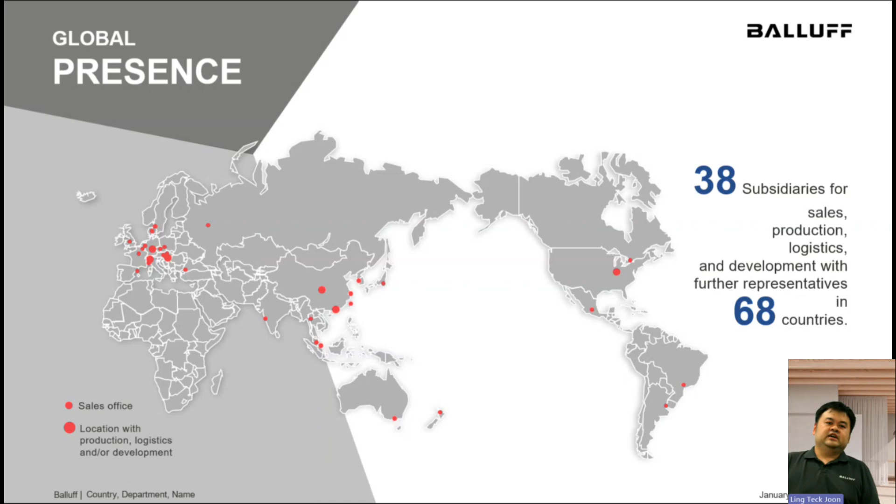We have 38 subsidiaries over the world, and we have further representatives in 68 countries. In the 1980s, we started our subsidiaries in Asia Pacific, starting with a joint venture with Japan.

In 2003, we started our own subsidiary in China, and we progressed to have our subsidiaries in Singapore in 2012, and further developed our own subsidiaries in 2020 in Malaysia.

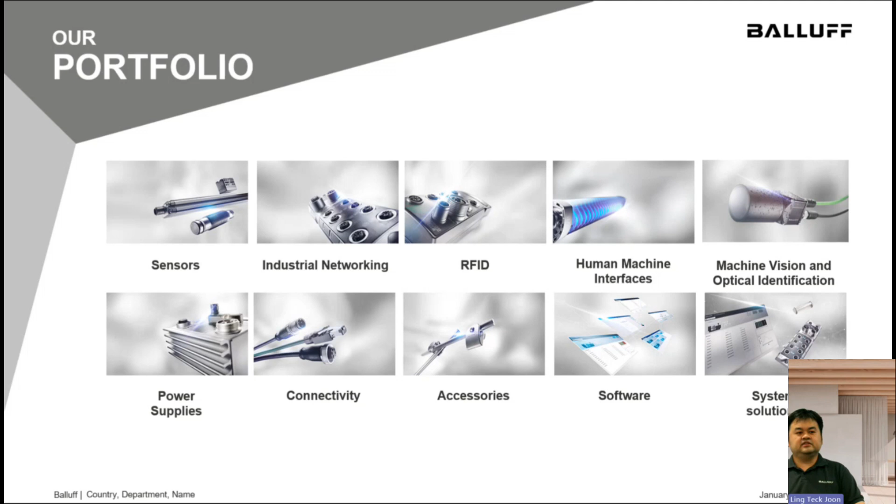So we have sensors, industrial networking, RFIDs, human machine interface, machine visions, and optical identification, power supplies, connectivities, accessories, software, and system solutions.

We are able to continuously evolve with development with customers, with interactive project progress and frequent deliveries of operable intermediate results. We are able to provide customized solutions to our customers. Let's say customers have a very special application, we can propose some solutions, and we have 24/7 account management and technical assistance, in case customers have problems during their operation.

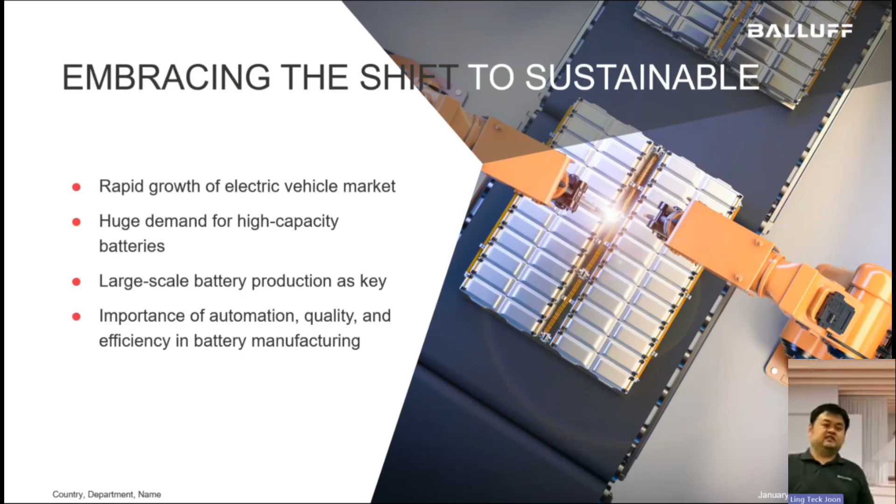So in the future, major players will develop their factories in most parts of the world so that they can easily spread the demands of EV batteries across the world. We are embracing the shift to sustainable battery manufacturing. With rapid growth of the electric vehicle market, we have huge demand for high capacity batteries. Large scale battery production needs keys like automation, quality, and efficiency in battery manufacturing.

So what are we able to bring to battery manufacturing? First, Balluff, we have our quality assurance, precise measurements, resource efficiencies, real-time manufacturing, streamlined communication, predictive maintenance, minimizing downtime, seamless sensor integration, and easy machinery retrofits.

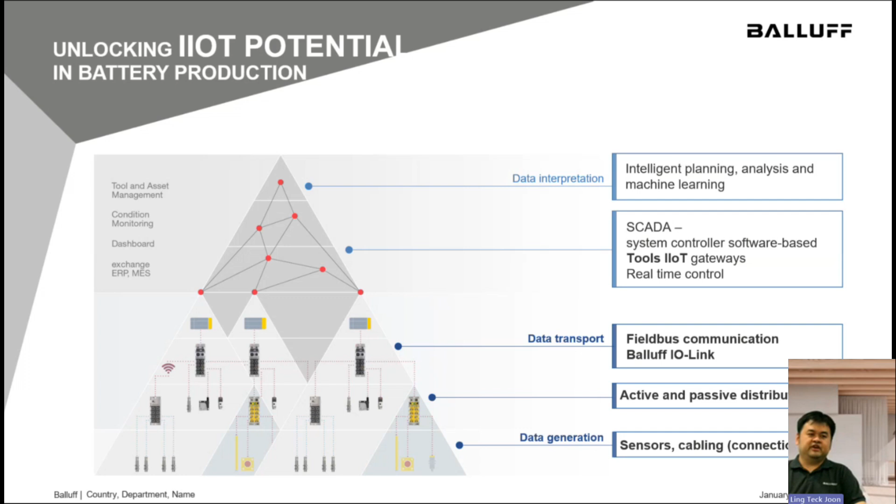This is what we can bring to the customers and what the customer demands from us. With IIoT, the information from the sensors can be sent via gateways to PLCs and even servers. With IIoT, this can be unlocked.

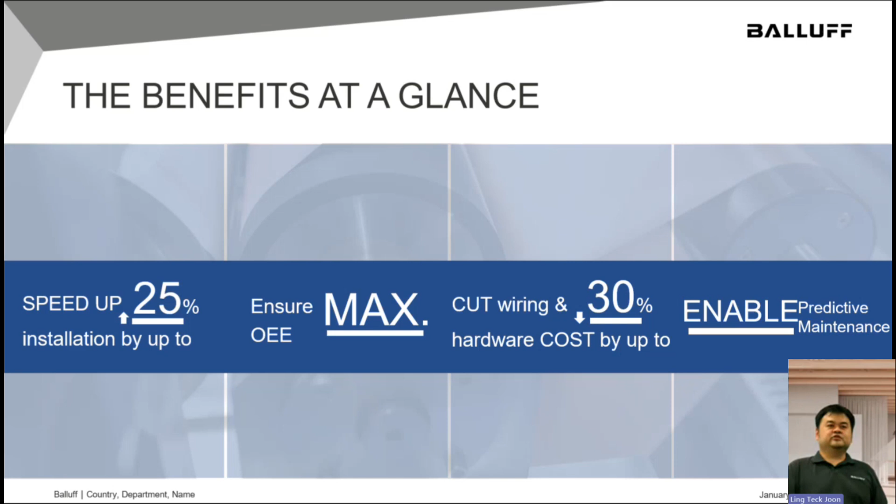So benefits for IO-Link at a glance: we can speed up the installation times, ensure max OEE, reduce cost of wiring and hardware, and also enable predictive maintenance.

So this is what Balluff is able to provide in our IO-Link portfolio. We have I/O modules, RFID, smart lights, inductive couplers, sensors, cables, and even power supplies.

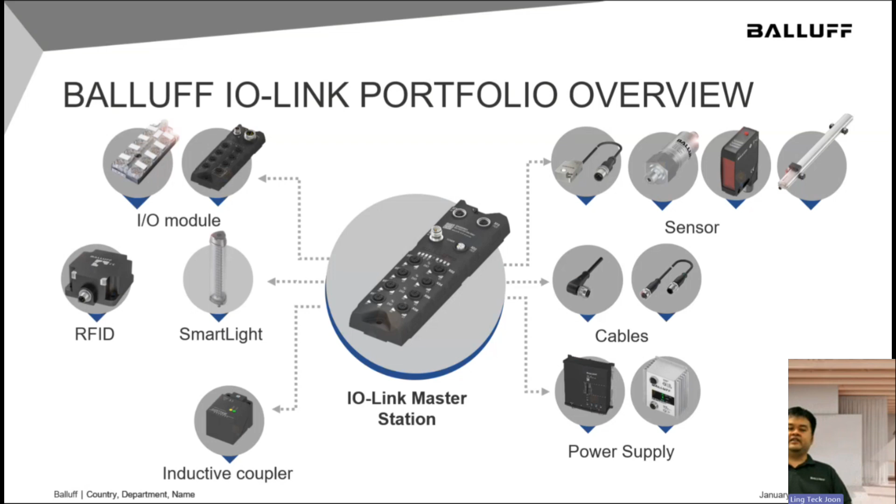So today I would like to introduce you to our new line of IO-Link masters. We have new black line, silver line, wash down, and even safety. We will talk about the new black line series that we already have on our website.

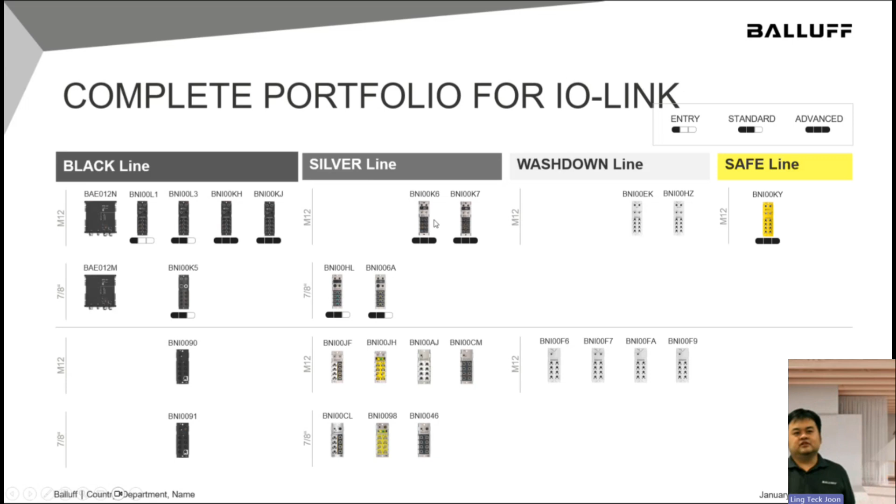So you can have it. After this, maybe you can have a look at our new products. With our new black line series, we have our entry level, standard level, and even advanced level. These are a few of the differences that you can have a glance at.

Entry level, of course, is for connection of IO-Link sensors, giving the best value. Standard can cope with a wide range of requirements but also retains value competitiveness. And advanced, of course, brings up our most features in our advanced master.

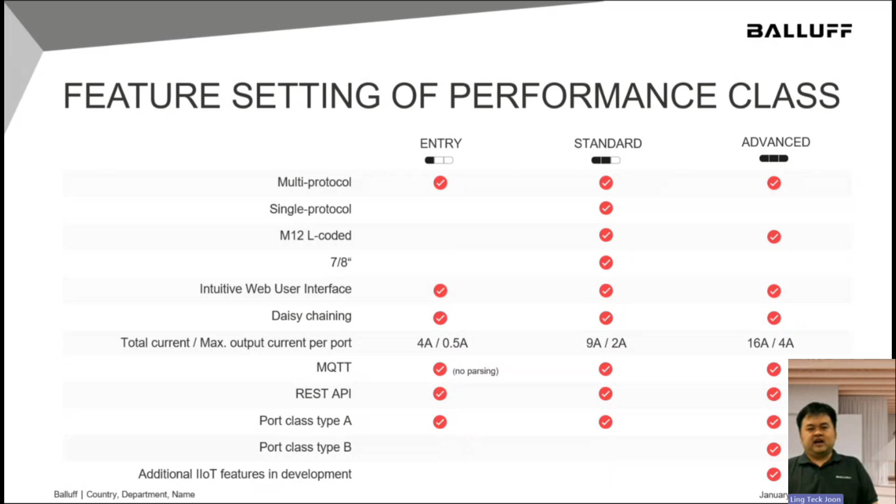So these are our new Balluff IO-Link masters. We are having multi protocols with Profinet, Ethernet IP, EtherCAT.

The power cables are M12 L-coded with maximum up to 16 amps. And we have two different types, IO-Link port class A and also class B.

We have IoT support such as REST API, MQTT parsing. MQTT parsing is available in our advanced class of IO-Link masters.

So these IO-Link masters can be configured and they are very easy to use. So those who have tried our previous generation of multi-protocol IO-Link masters were able to get used to it very fast.

In the advanced master hub, the maximum currents are 4 amps per pin. So they can be used as an output to power or to trigger high current actuators.

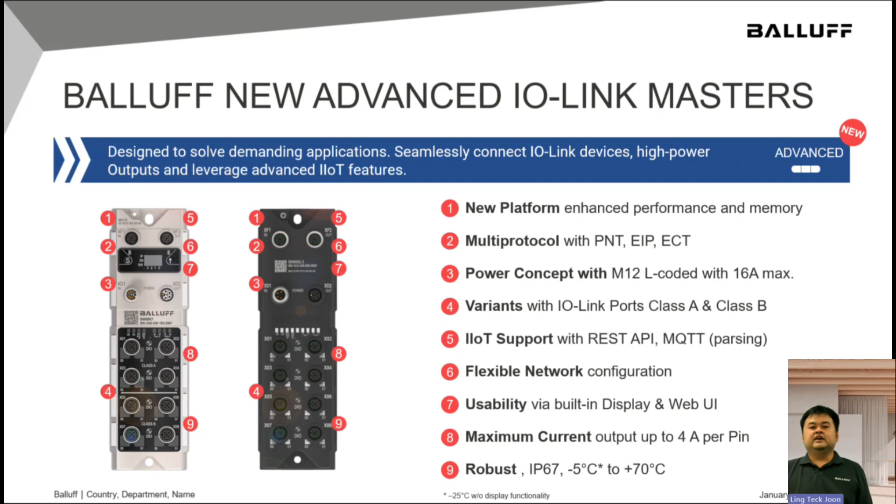And they come with robust design, robust housing with IP67, and they're also able to withstand a wide range of temperatures.

In battery manufacturing, copper and zinc free are very critical in the process. So we have copper and zinc free portfolios specially designed for battery manufacturing.

Why is it? So copper and zinc, if contaminated with chemicals, will cause puncture in their diaphragm, and then will cause uncontrollable fire. So copper and zinc free is quite critical in the battery manufacturing plant.

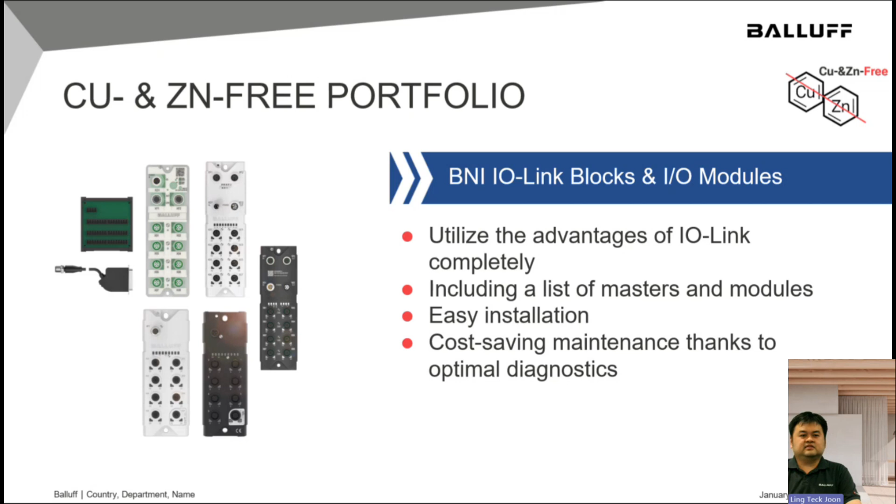With copper and zinc free portfolio, we have BNI. BNI is our master hub, so master hub and IO-Link modules. We can utilize the advantages of IO-Link completely, including a list of masters and modules, easy installation for commissioning and also for plant operators, cost saving maintenance thanks to optimal diagnostics.

Beside the IO-Link masters and IO hubs, we also have copper and zinc free RFID systems, so we're able to do track and trace for the whole battery manufacturing process. This includes our RFID, HF and ultra high frequency in read and write heads with our processor units.

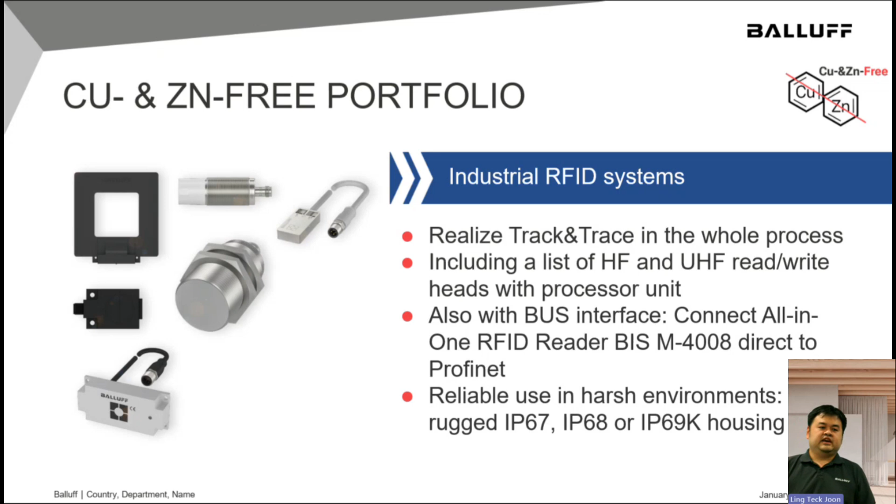Also we are able to provide signals as in bus interface as well as Profinet. And then all these RFID read and write heads come with a high IP rating, so IP 67, 68, 69K, and they're able to be used in harsh environments.

Beside RFID, we are able to provide our inductive sensors in stainless steel housing. Why is it stainless steel housing? Because it's copper and zinc free.

And the stainless steel housing is a very resistant material. They're able to be used in harsh environments. So they are ideal for object detection in battery manufacturing, cylindrical design, and also square design.

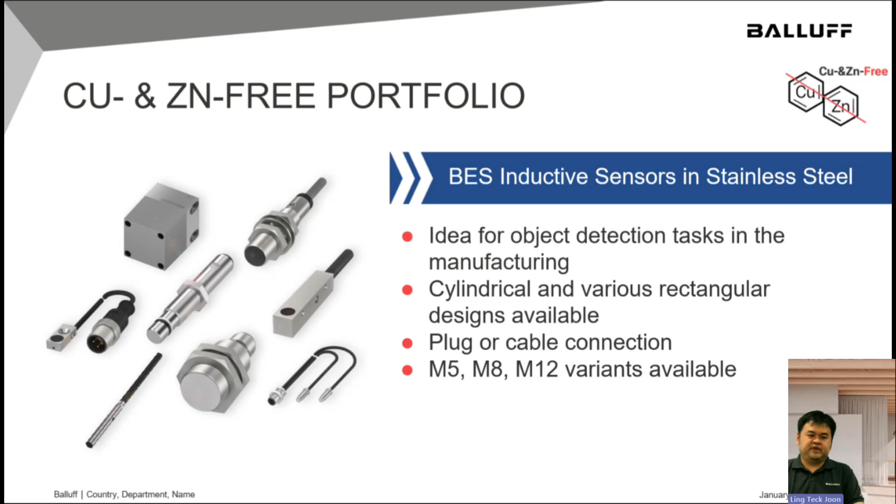The inductive sensors come with plugs or even cable connections. So they have M5 connectors, M8 connectors, and also M12 connectors.

Beside inductive sensors, we have also our cables. These cables are also copper and zinc free in the connector side. So connecting these cables can connect all levels of your automation system.

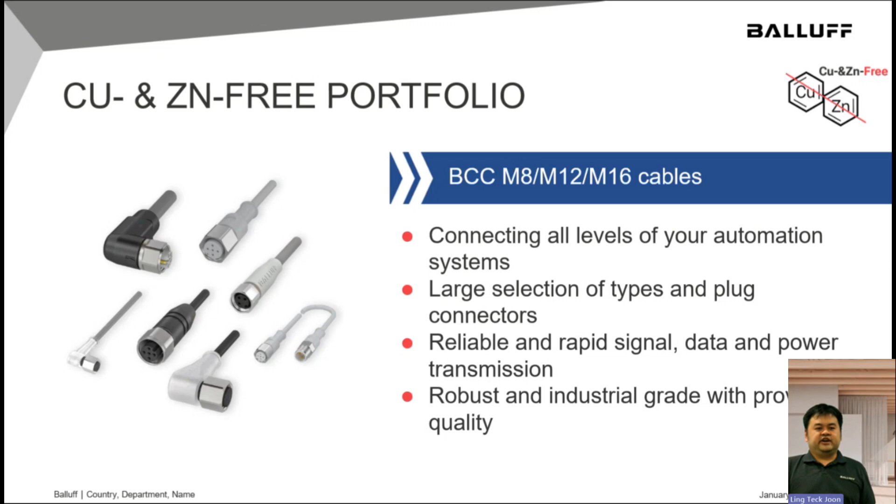A wide selection of plugs and connectors, reliable connection from the sensors to IO-Link masters, and then from IO-Link masters to your PLC and even to your SCADA. And they provide robust industrial grade with proven qualities.

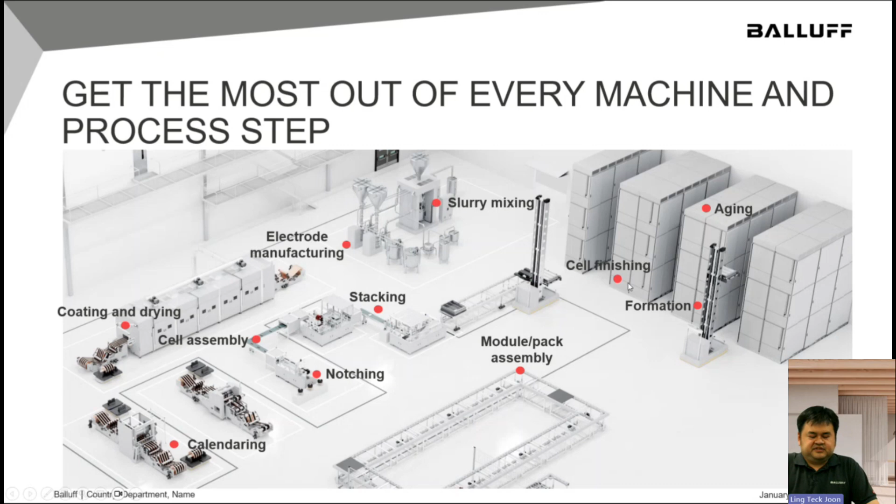So the slurry mixing process is very critical, where different types of chemicals are combined together to create electrodes for the battery. So we need to have an optimized slurry mixing process.

We can do it with IO-Link. So we're able to monitor the mixer condition. The mixer comes with a motor, and we can use our BCM sensors, which are our vibration sensors, to monitor the mixing conditions.

We measure tank levels with our ultrasonic sensors, so the level sensors do not need to be in contact with the slurry. And we're able to monitor the temperatures as well as pressure with our temperature sensor BFT, and also BSP pressure sensors.

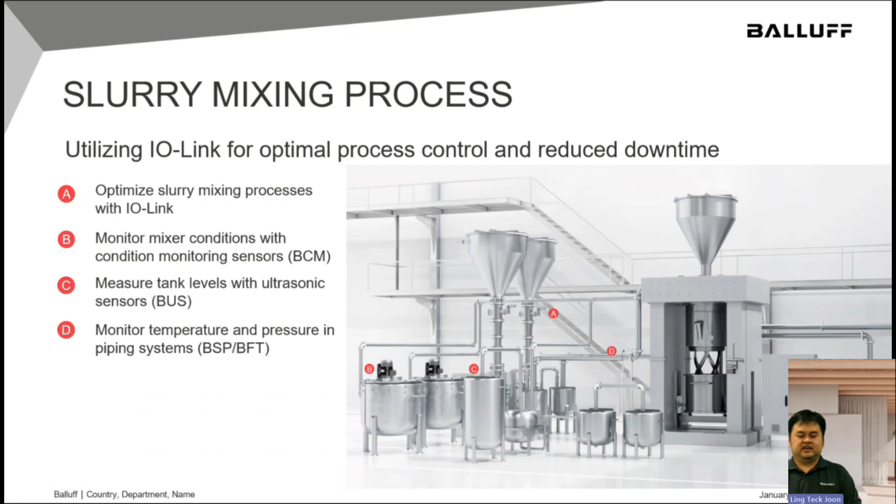So the right sensors need to be used in order to optimize and create an advantage for us in our battery manufacturing.

Next we go to the coating and drying process. IO-Link as a gateway is a cost-effective material for tracking and monitoring. So we need to make sure the film is coated with enough slurry to maximize the output of the battery. So the process is very critical.

So we need to track all the processes, all the data.

So we can do this with our IO-Link system. We connect to an RFID, and this RFID will read and write all the important data to the tag. This data will be transferred to a server for data management and tracking purposes.

We also have exhaust fan health condition monitoring with our BCM, as well as humidity and ambient pressure monitoring with our vibration sensors. This can be done using BCM, our vibration sensor, and CMTK.

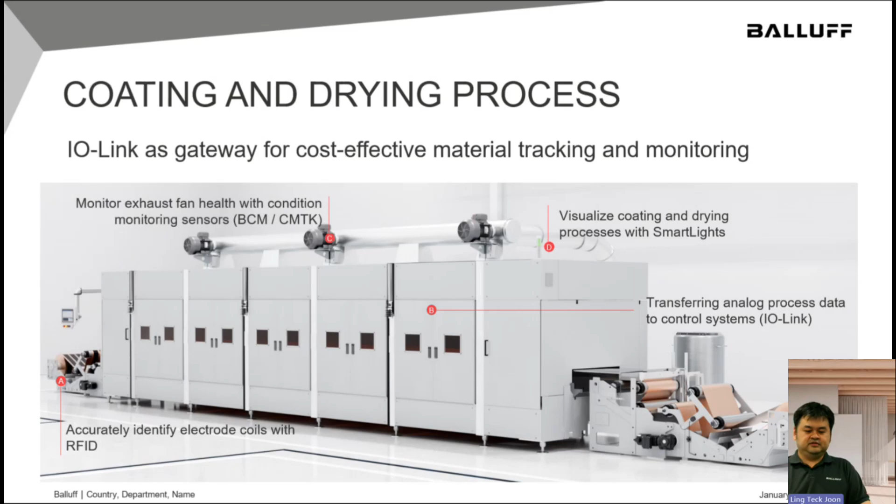Then we can do some visualizing - is the machine in normal operating mode - with our smart light, or stack light. This stack light requires IO-Link, so operators can from far away visualize the status of the machine - whether it's normally operating or having errors. We can easily visualize this.

So, the calendering process - this is where the roll is ensured to have consistent electrode thickness and quality. This can be done using IO-Link to help monitor and adjust the parameters in real time, to make sure all the films are coated with the correct amount of chemicals, the black color parts. This will ensure a higher output of battery quality.

We have BDG sensors, which are our format changeover sensors. We have our smart lights as visual and acoustic monitoring of the machine. We again have IO-Link and RFID for real-time transmission of sensor data, and special inductive position sensors to precisely control the roller position.

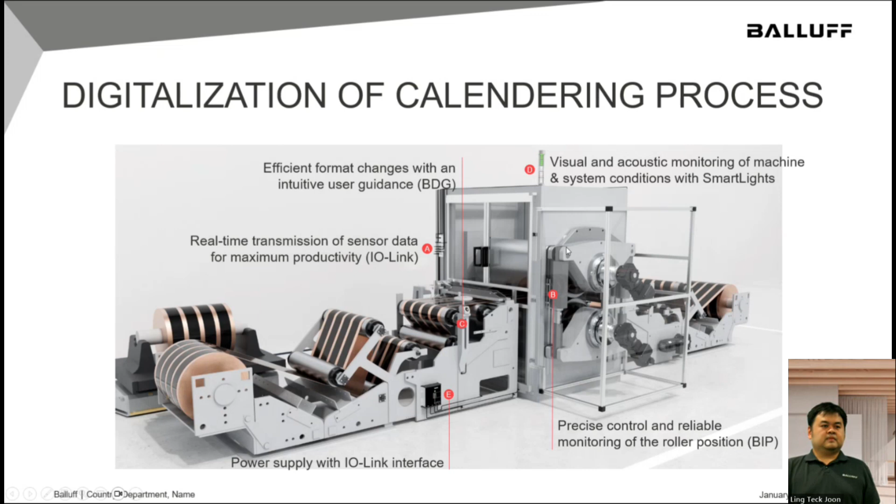So now we enter the traceable and digitized notching process. We have an RFID system to make sure it records and differentiates different batches of batteries. In this notching process, we ensure that each electrode is accurately formed and each tool is properly tracked.

By using RFID, we can identify different tools being used - is the tool still in good condition, and ensure this with our tool identification via RFID system. So the correct tool is always loaded and used, and the tools are kept in good condition.

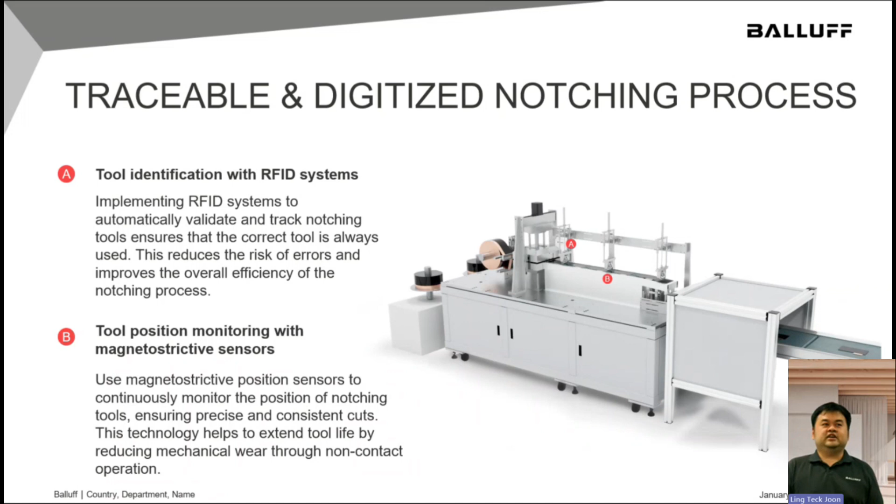Then, tool position - we need to know where to cut the film. With our magnetostrictive position sensors, we can easily monitor the position of the tool to precisely cut the film, and then turn it and package it into a battery cell.

Sensors in cell assembly - again with our position sensors, magnetostrictive sensors, we are able to monitor the welding position. These battery cells are welded together instead of soldered, so spot welding is critical. We need to ensure tool position is correct with our magnetostrictive sensors.

For position sensors, we use fork sensors, where the fork sensors need to be small in size so they can fit into tight spaces. Some of the cells have barcodes on them, so we provide code readers, and the cell itself can be reliably detected with components like photoelectric sensors.

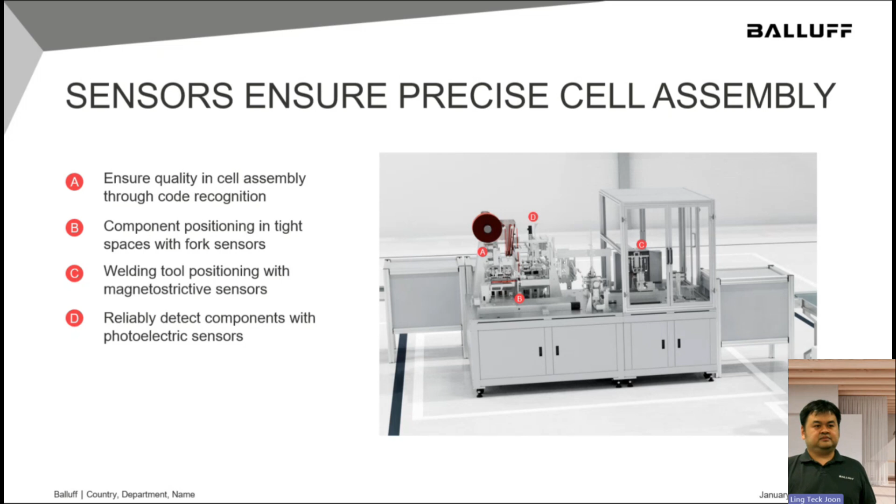With this, we are able to ensure maximum precision in cell aging. Magnetic position sensors ensure precise positioning, enhancing the efficiency and accuracy of battery storage operations.

We also have optical sensors providing reliable object detection for a stacker crane's position, to load and unload the pallets where the cell is kept. Depending on the use case, red light, blue light, or laser light, which Balluff offers, are ideal for small part detection.

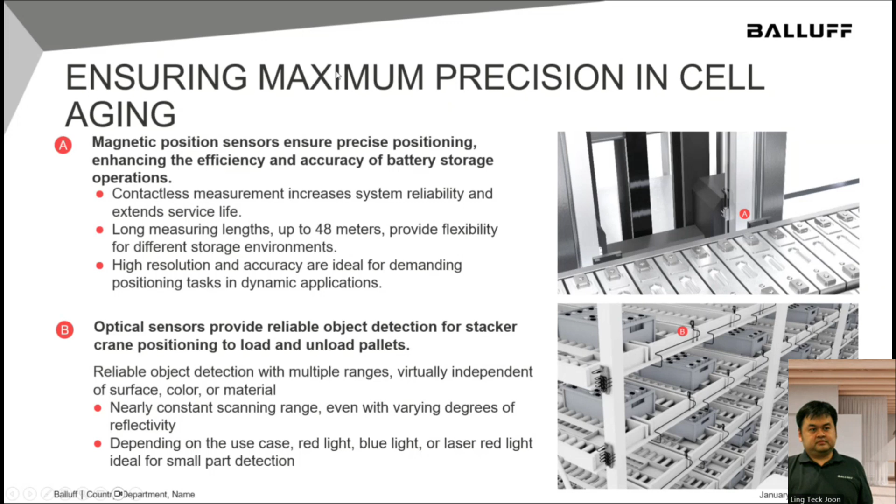Optimizing material flow in the intra-logistics module and package assembly line - this is where we come to our RFID. The module where the battery cells are finalized will be tagged with our RFID tag, recording the batch number, production date, and where it was produced. This enables good tracking of the battery cells.

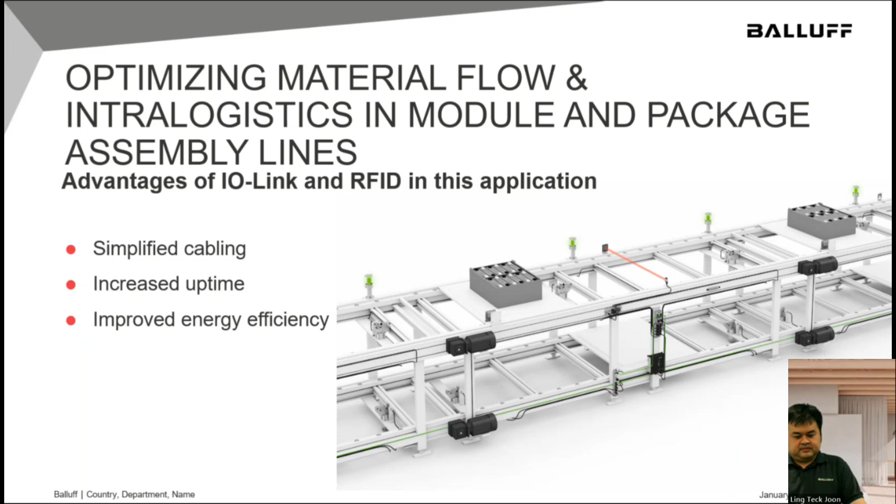With this, we enable simplified cabling, increased uptime, and improved energy efficiency. So here we come to a conclusion - that we are able to provide end-to-end sensor portfolios.

We enable IoT with IO-Link. Balluff is also a leading provider of industrial RFID solutions, and IO-Link is becoming more and more popular. With this kind of technology, we are able to provide predictive edge and condition monitoring. Balluff has decades of automotive experience, and we can share our knowledge across automotive as well as battery production.